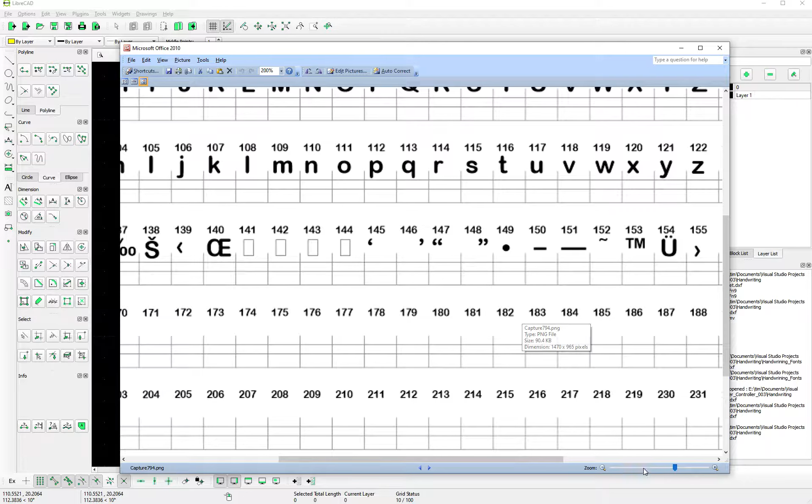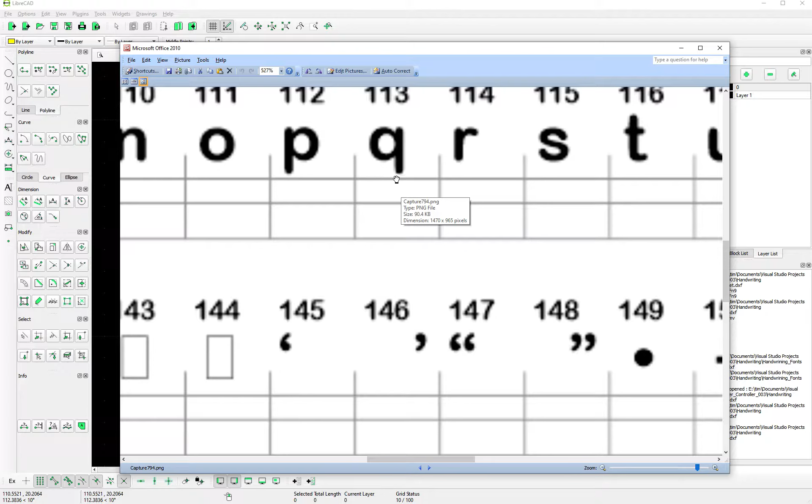Basically, the first thing to do is to actually write all your characters. So I use a sheet similar to this, I put one on my web, in which to write each character. It's got all the characters listed out with the ASCII numbers, and if you have a close look, these lines, the top line and the bottom line, are 5 mil apart.

This is my default size for my program. So basically, if we make all the capital fonts 5 mil high, my program knows what to do and can scale them from there onwards, basically.

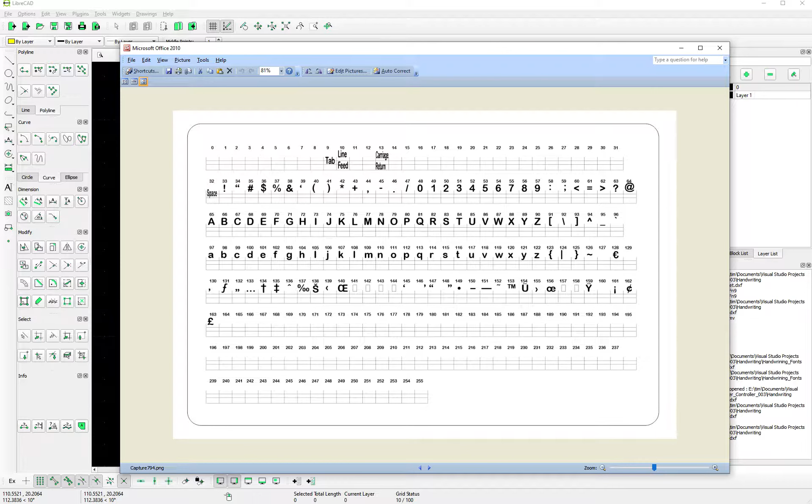So once you've written all your fonts, you should actually end up with something like this. So this is one I did, it has all my handwritten characters on there. Once I've done that, I scan them.

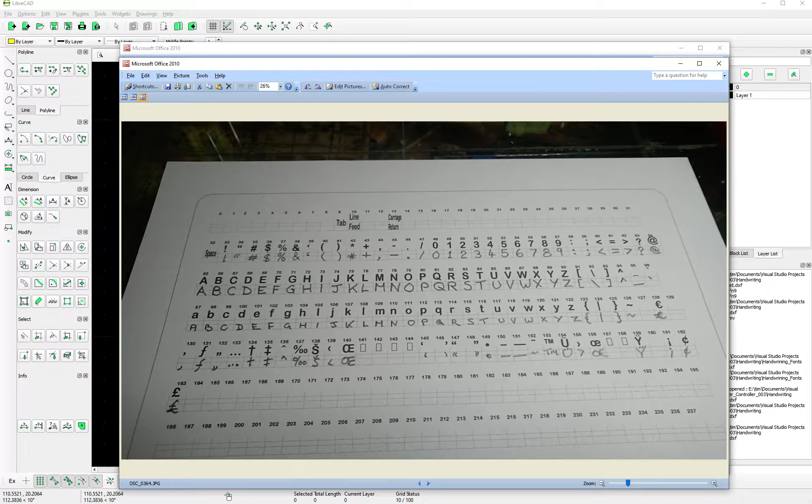Once I scan them, I use Corel Draw, but any program, Inkscape or such, you can convert them to vector graphics. Basically, I do an outline conversion, so I just convert them to an outline, set so that it looks pretty similar to what's been scanned.

Once you've got your outline, get rid of all your white bits. You can delete all these, and I also delete the originals, so I'm just left with the handwritten characters. Once I've converted them to vector graphics, I then export them as a DXF file.

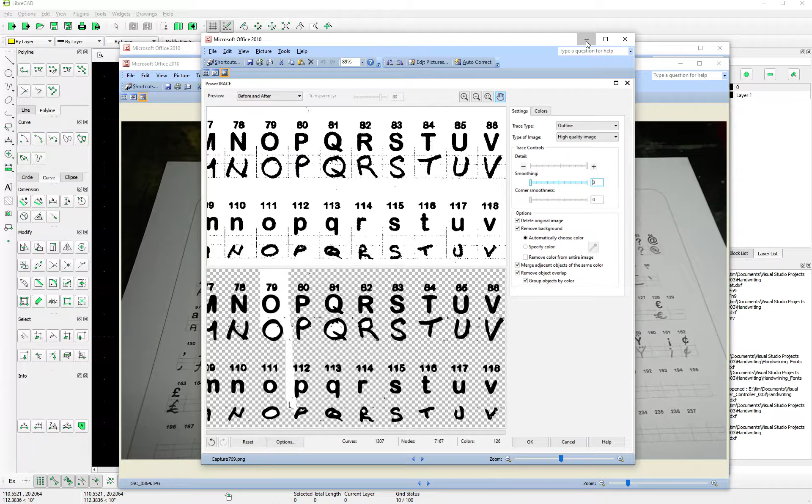Then once you've exported them as a DXF file, you can load them into LibreCAD, and you should have something similar to this. You've got the outline of each character that you've actually handwritten.

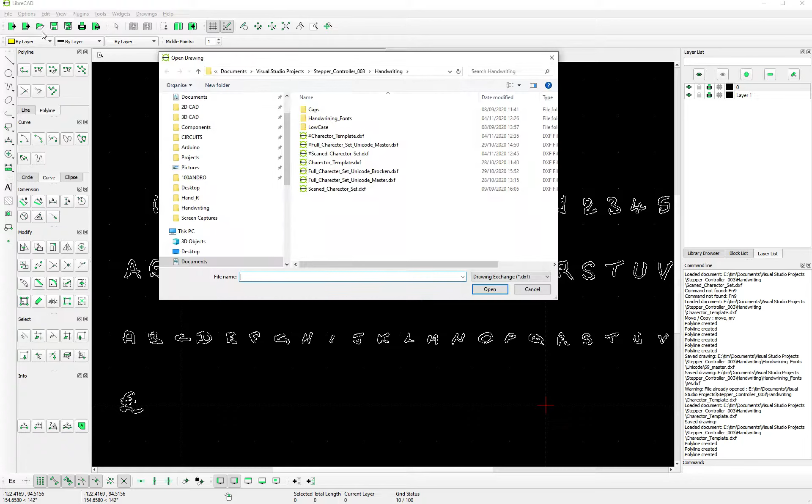So then once we've got the full set of characters, we now need to create a DXF file for each character. So to start with, what I'll do is I will open up my template, my character template. Basically, this is just a box, and it's the same size as this box we had earlier.

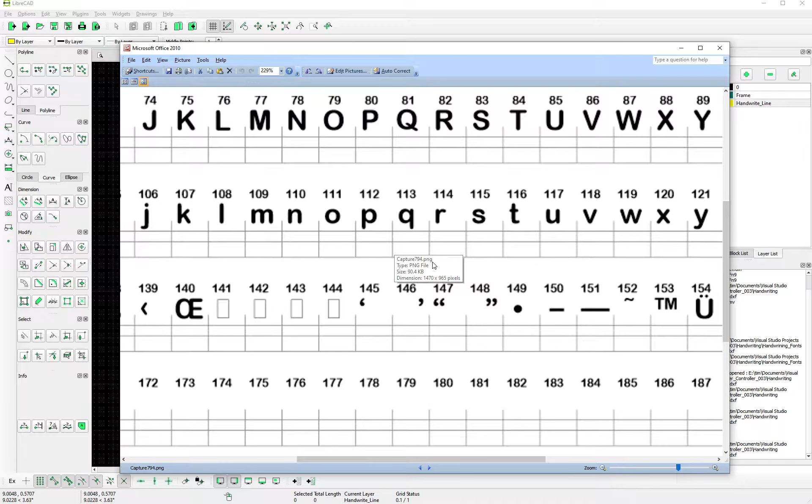This box here is just the same as this box. So then if we take a character, let's take the character E, and let's copy that. So if we go to copy up here, and then we set its origin, zoom in so that we can get a nice snap to a nice point close by.

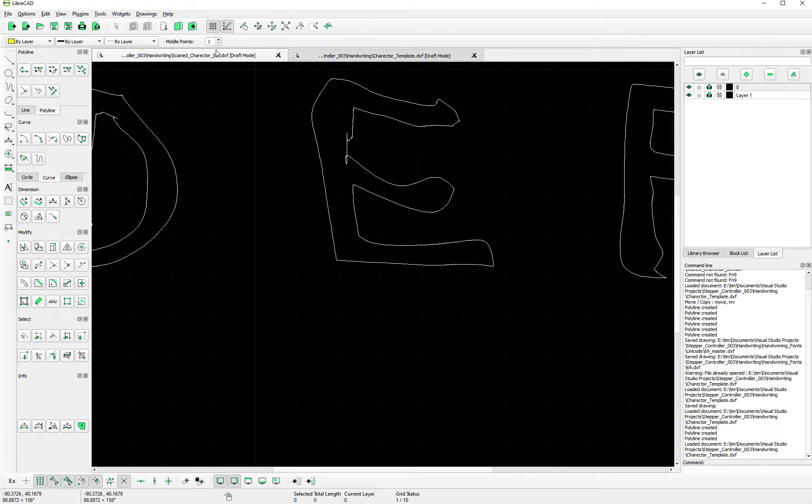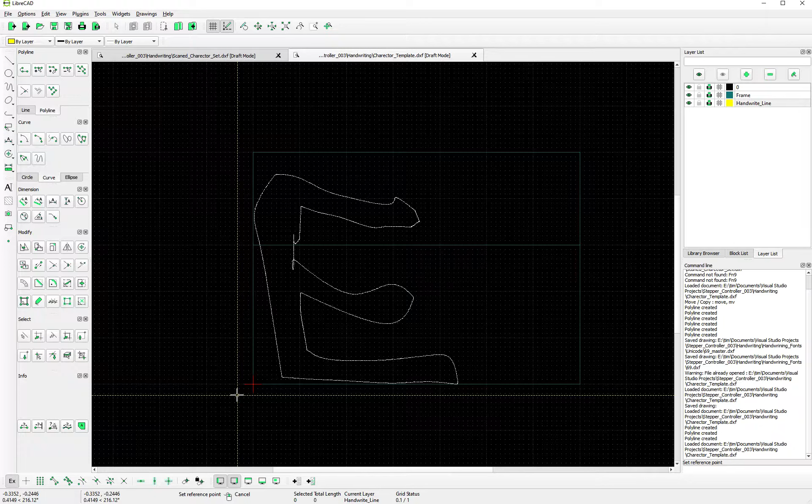Once we've copied that, we can go out to our template and we can then paste it in. So we'll go paste, and if I turn off snaps, we can position it to the most left point and the bottom point, so basically somewhere there like that. Once it's in position, we're okay, I'll put the snaps back on.

What we need to do now is actually draw the lines the computer, the plotter, will use to write the letter E. So if we turn on our handwriting layer, so we're on our handwriting layer, and everything we do now is on that layer, and we're going to use the 3-point curve here.

Basically this 3-point curve. Nobody actually draws an exactly straight line. All your lines when you're writing are either a slight curve or a big curve, they're basically a curve no matter what. In general, unless you're going to use a ruler, but they're all going to be curves. So we're going to use this 3-point curve for every line, we're going to build all the characters out of these 3-point curves. This is the only one we're going to use.

Now what I suggest here, so if we click that, is for each character you may want to just write it again on a scrap piece of paper and just do it in slow motion so you can actually see how you write it, because when you're writing you just do it automatically, and you do it so often you don't actually know what you're doing, you just write it basically.

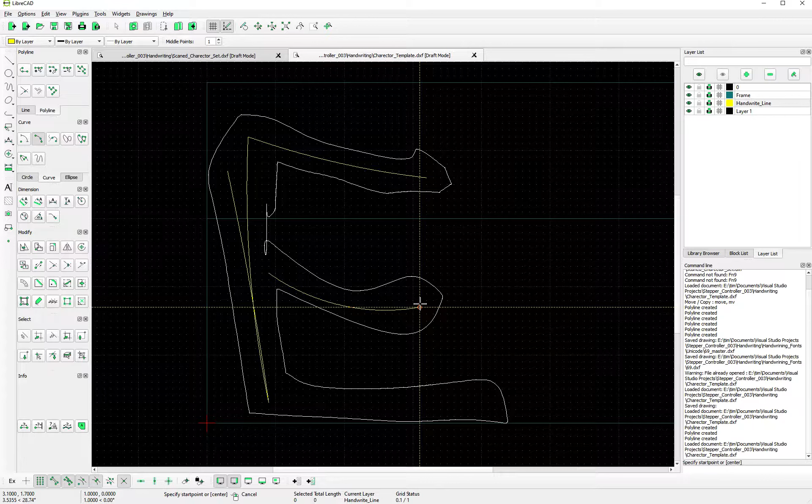So I come down to here, then from there I come back up and I come up to here, and then from there I then come down to here and to here. So basically I do all that before lifting my pen, and then I lift my pen and I come to this point, and then I come down and I come to here, and then I lift my pen again, I come to this point, and then I come to here. So basically that's how I write an E, and so if you do it in the same order, then your plotter is going to do it in the same order as well.

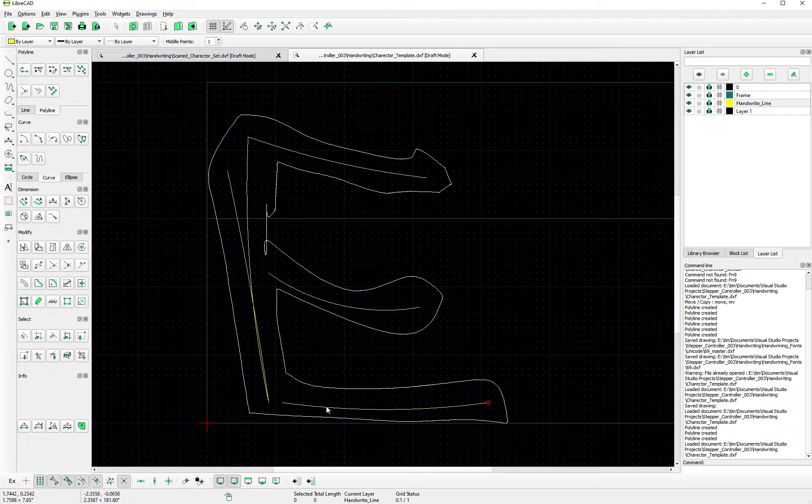So once we've actually got the lines that we actually want to create the E from, you need to select them all. It doesn't matter which order you select them in. But we want to convert them all now to polylines. So we've got our polylines up here, and what we want to do is we want to create polylines from all those lines. The way I've written my software is that it writes polylines better and faster than it does single lines. If they were all single lines, the pen would lift at each and every one of these points, and we don't want that. So like for this line, we want this line to be one line, and we don't want the pen to lift until it gets to the end.

So basically what we need to do is we need to convert them to polylines, and when we convert them to polylines it will convert them in the order that it's going to draw or write them. So if we go click once, we can see that's the first one it's going to actually draw, and then we're going to draw that one, and then that's the last one it's going to draw. So we know that's the order it's going to go. It's going to go this one, and then this one.

We can also check the direction in which it's going to draw. So if we select them, we can see the light blue is at this end. That is the start point. And you can't see that because it's got the last point there. But this one's going to start there. The light blue is the start and the dark blue is the finish. And then if we click this one, we can see the dark blue there, that's the finish, and the light blue here is the start. So it's going to go start there, it's going to go down, up and across. So it's going to actually write that letter E the same way I write it.

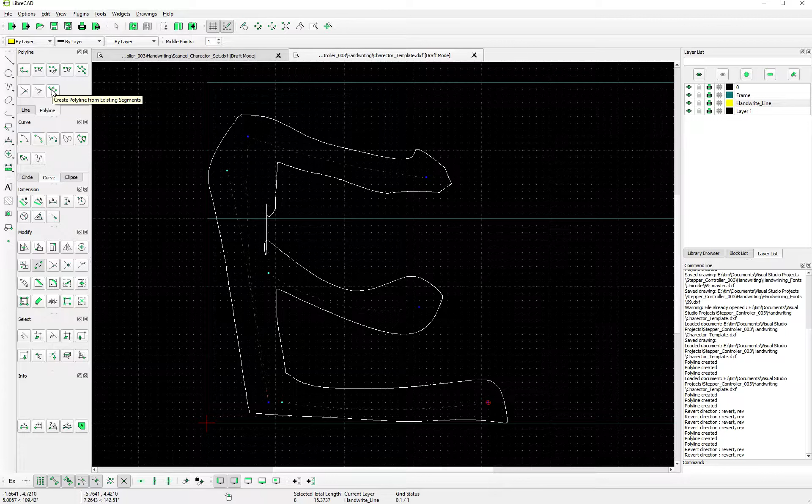But I want this one to be the last one to be drawn. So what I can do is I can click that and do a modification on it and bring it back, so then it's there. And now that was the last one I modified, it is the last one that is going to be drawn, because if I check that again by creating a polyline, I can go that one, and it's got the middle one, and then it's got the bottom one,

and it's in the correct order that I want them to be. So once we've done that, what I tend to do is, once I've created all my fonts and everything, I do two copies of this file. I do a master and an actual copy. The actual copy is just the font, the ASCII character number.

So if we look at, in each folder for each font that we create, there needs to be a handwriting data text file. You can see an example. I've done an example, so you'll see that this file is in there, and this file lists each character number and each character that belongs to it.

This is the decimal number, and then the next column is the hex number, the next column is the actual character, the next column is the width of the character, and the next column is your shortcut if you want to create this character on a web page. Basically, if you type that in your web code, it will create this character.

So the important one for us is this column here, this fourth column. This is our width. So if we look for our capital E, we scroll up, we get our capital E. At the moment it's set at 5 millimeters width.

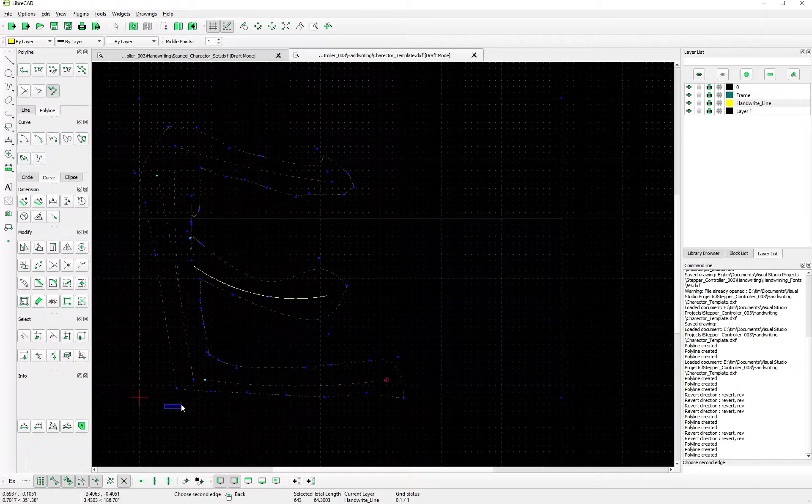So from here I am going to add 1.5 mils. So I'll go 1 mil, and then I'll go 1, 2, 3, 4, 5. That's 1.5 mil wider. So from there to here, what did I do that for? Right, so from here to here, we can count 1, 2, 3, 4, 5.6 millimeters.

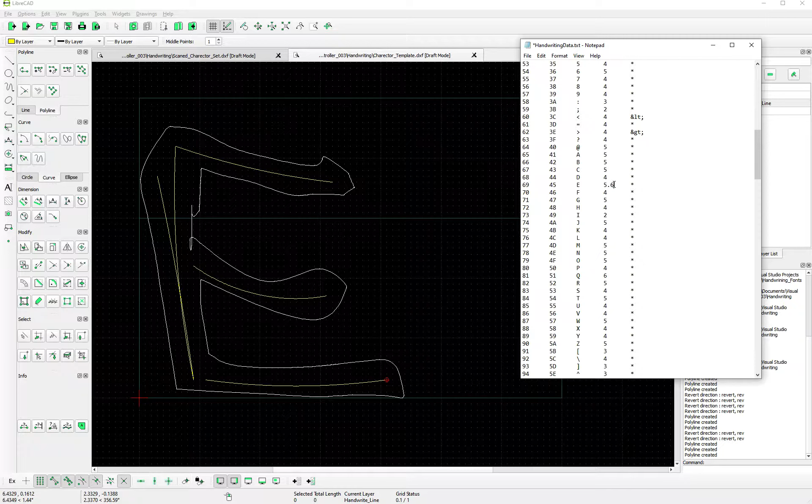So that is the number that we're going to put in here. So what did I say? 1, 2, 3, 4, 5, 5.6. So I'll just put 0.6. So for our letter E, it's 5.6 mil wide, and the character we need to save it as is 69.

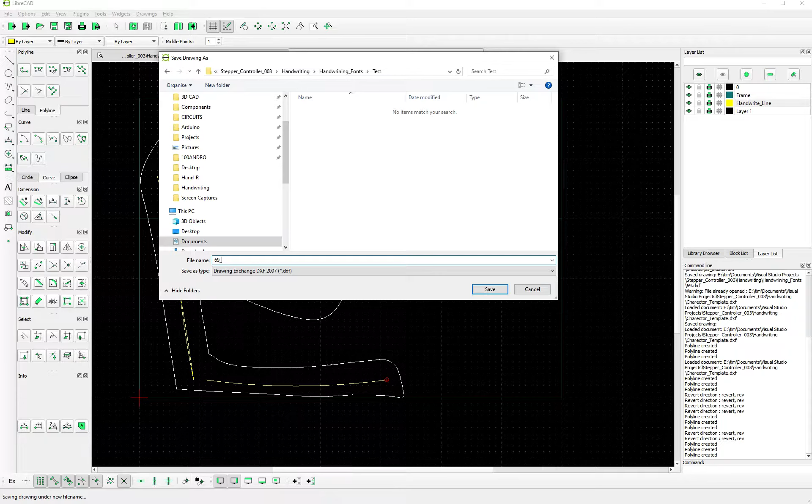So for this, what I will do is I'll do a master. So we'll save that as, I'll put it in this folder, 69 master. So basically I've saved everything in my master. This is because once I have created all my characters, I will do a test piece. I will get my plotter to do the alphabet, and if a character isn't quite right, I can come back to my original and see what I want to change.

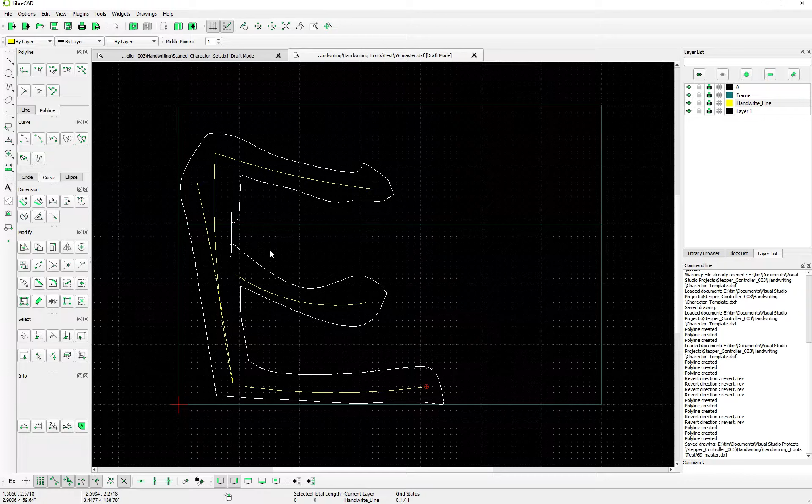Then what we also want to do now is create the actual character that the plotter is going to use. So I'll just turn off my handwriting, select everything and delete that. Then I will turn on my handwriting so that we only have the lines that we want to use when we draw the actual E.

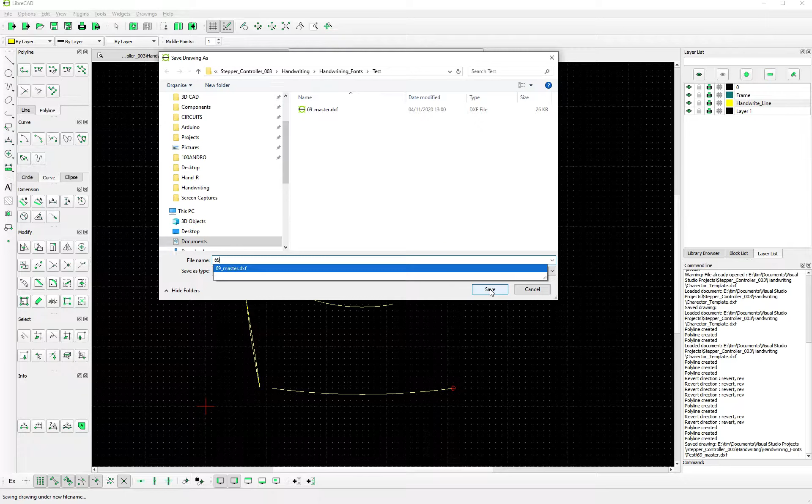So what I'll do is I'll now save that as 69. So it's just the actual ASCII number, and that's the one that the computer will use to actually draw that letter E. So we can save that. And then what I'll do is, once that's done, we just move on to the next character.

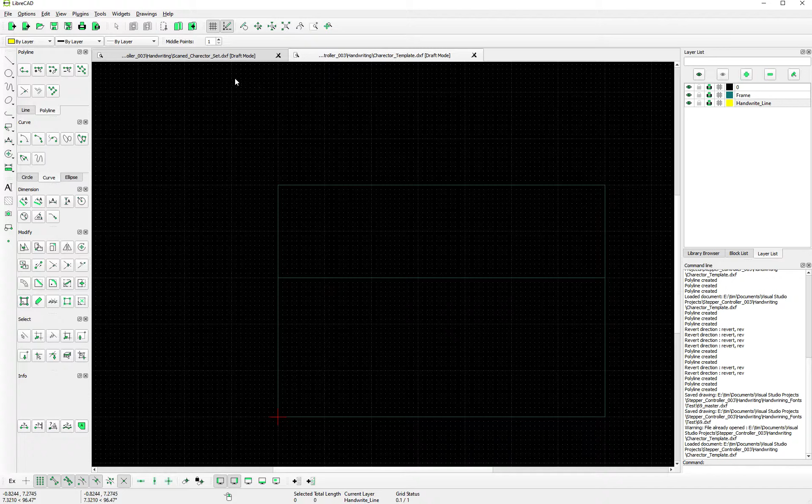What we'll do is we'll open up another character template. Then we'll just go back and choose another character, and then we'll just copy that, pick a point, go back to our template, and then we'll just paste it in. I'll just turn off snap so I can line it up, and then that's going to fit in there like that. And then we turn on to handwriting again, so I'll just work on this layer, and remember we're just using this 3-point curve.

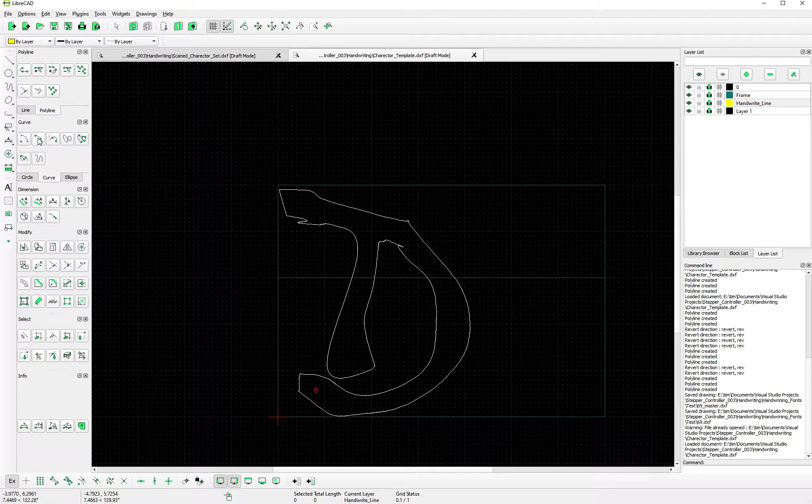Now we can't do this, basically that's not going to be correct, is it? So what we do is we use our curve, and then we try to look for how many curves are in there. There's one there, there's one there, and then it's fairly straight there, so we'll make that one curve, and then we get a shallower curve here, then there's a tight one there, and a bit of a straight. So what we'll do is we'll make it in that many curves.

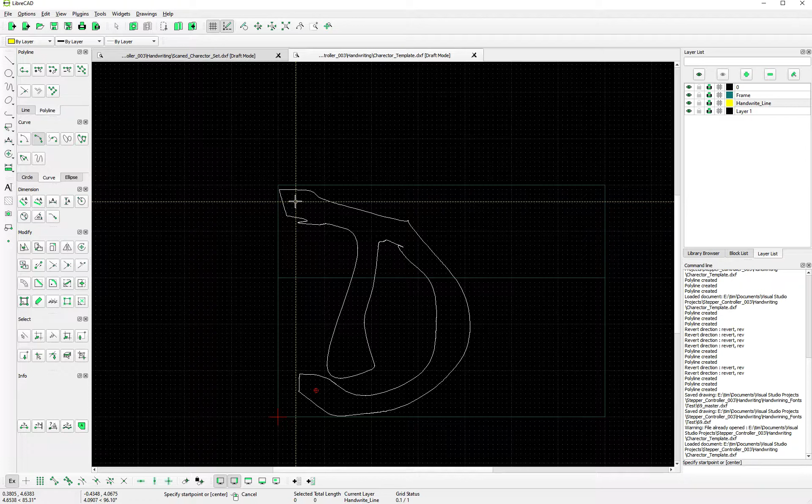So we'll start with that curve there like that, then I'll put my snap on, because I want to snap to that point, otherwise our polyline won't work basically. So then I want a bit more of a curve here, and then from there I do another curve, and then from there we'll do maybe another curve, and then from there do a tighter curve, and then from there another curve. And there we go, we've followed it.

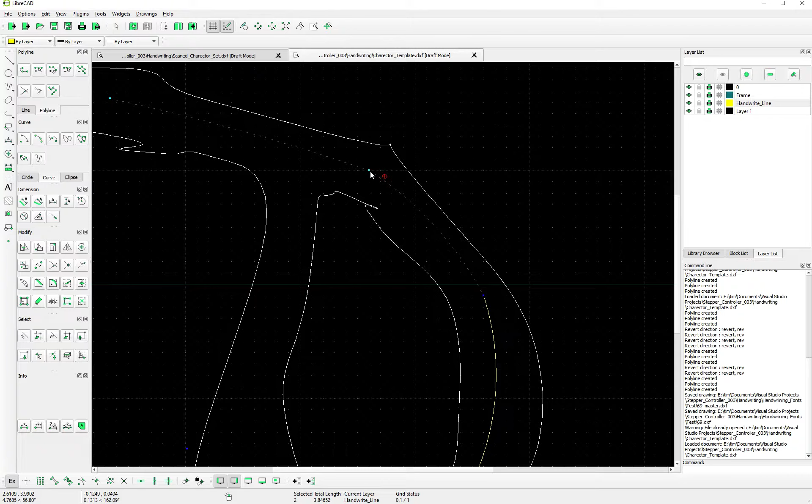You can adjust it. What we can do is we can select that, and we can grab that point, and I can just move it where I want. If I take my snaps off, I can get it a bit smoother. There, look at that. And then once you're happy with that, we do our other curve. And this is a bit of a squiggle here, so I'll just come down and I'll go like that, then I'll go from there to like that. So that was our 2 curves.

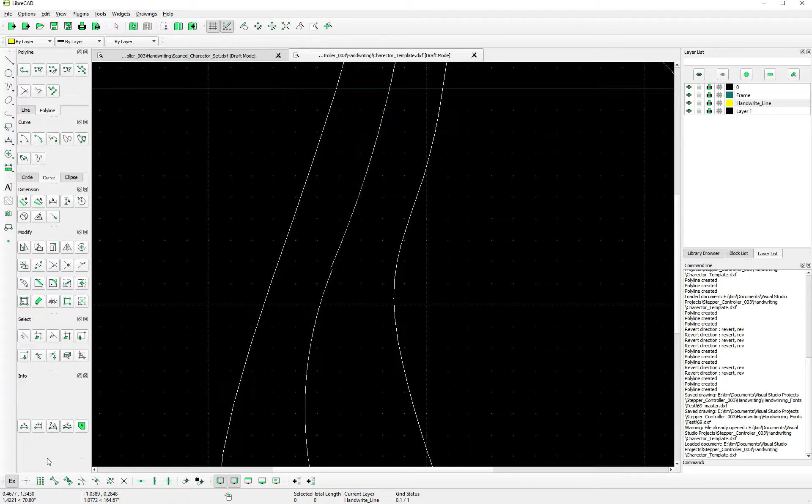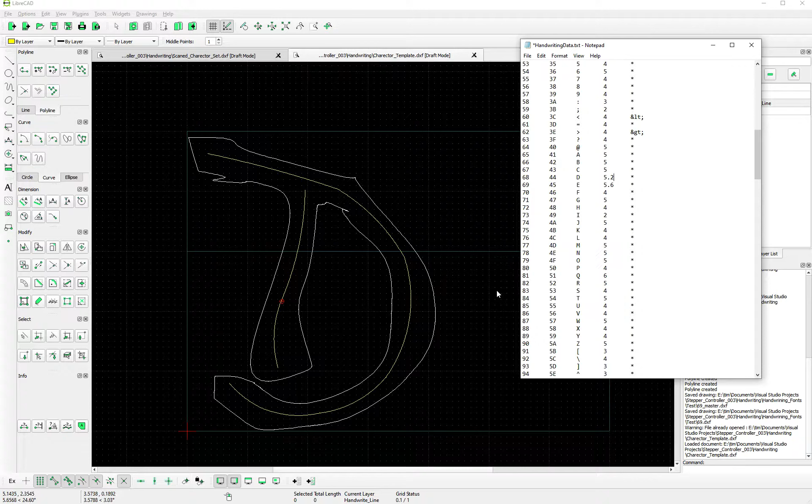I missed that point because I didn't have my snaps on, so I'll just zoom in, grab this, and just snap that to that point, so those two are connected. So basically that's our D, and we just do the same as we did before. If we bring our text file in, we look at our capital D. I've got it at 4 at the moment, but what we have is 1, 2, 3, 3.7 mil, and so I add another 1, so I'll just go to 4.7, and then 1, 2, 3, 4, 5.2. So for my D, I'm going to put 5.2 in there, because remember we need a little bit of a gap to the next character as well.

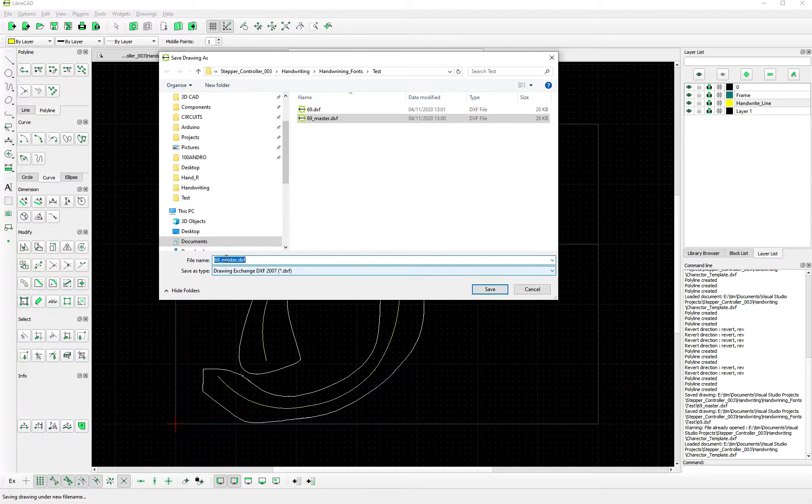So once I've done that, what was my D? My D was 68. So basically I'll save this as master 68. Change that to an 8. So that's my master done. Oh well, I've forgotten something. We must remember that we need to make all these as polylines. So we should just end up with 2 polylines here. So we go polyline, that's the first one, and then that's the second one. We just check the direction. We can see this is the start, and that's the start, and that's how I want it to be. So that's correct.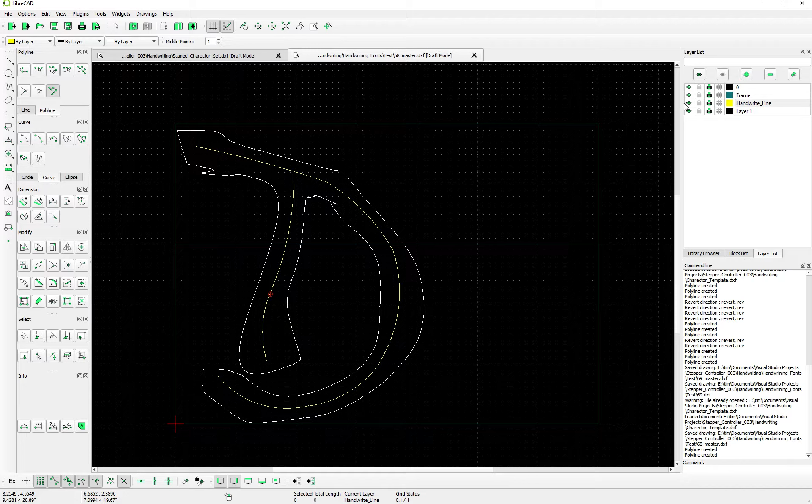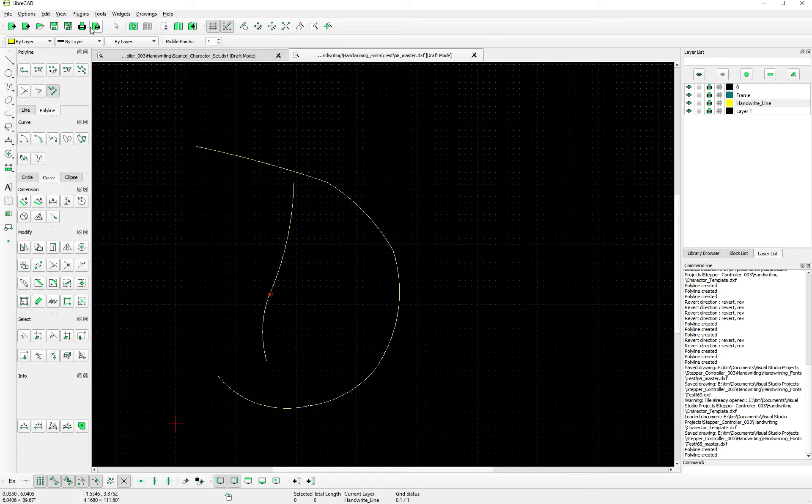So I'll just save that again because it's saved as master, and then I will turn that off and delete the other stuff, turn it back on. So that's our D, and then we just save this one as, what was it, 68? D is, yes, 68. So we go save as 68, because that's the one the computer is going to use, and we save that, and then that's the D done. So basically you need to do that for all these characters, and then once that's done, the program should work. So I hope that's been of some help.